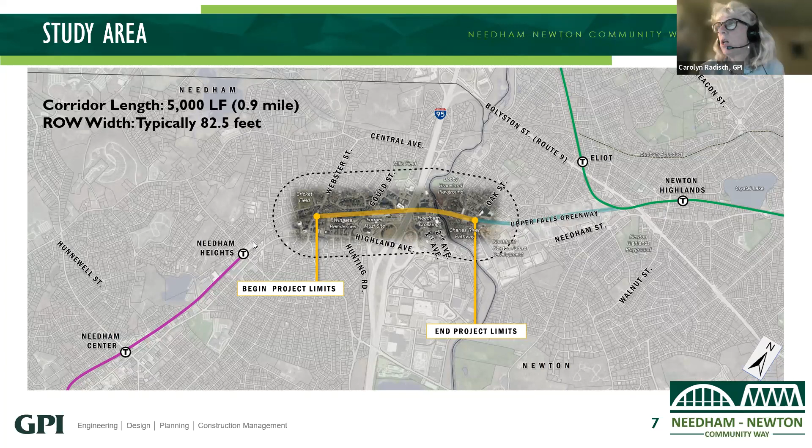The scope of the study was defined in the federal grant that funded the feasibility study, and that is to provide a community way between Needham Heights and the Upper Falls Greenway in Newton, as I just mentioned, and how that has been refined through the study.

The study was to consider a shared use path, with two options specifically called out: a path that accommodates only bicycles and pedestrians, and an alternative that accommodates bicycles, pedestrians, and electric shuttle buses. The recommendations for design and construction are based on standards and the feasibility of the different elements of the project, the bridges, the corridor.

Further planning and selection of a preferred alternative will be undertaken by the communities of Needham and Newton.

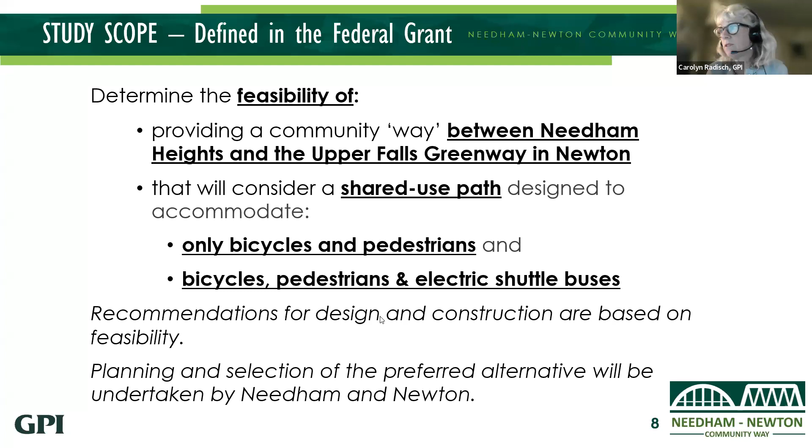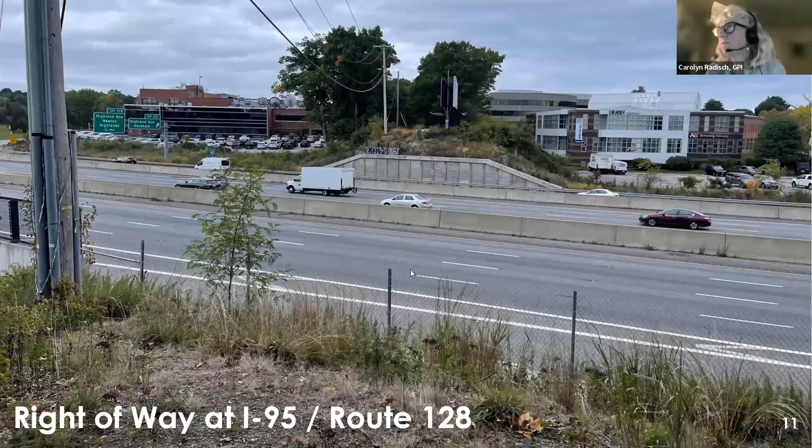This is the right-of-way at Route 128, I-95. As probably most people know, there was a rail bridge here until 8 years ago, and it was removed to add additional lanes to Route 128 for MassDOT's Add a Lane project.

So now we have basically 3 lanes in either direction on Route 128, I-95, as well as 2 exit lanes and 2 on-ramp lanes at this location. Altogether, that's 6 plus 4, 10 lanes, and it's about 225 feet to span this distance across I-95.

There's still an earthen fill area, which follows the path of the tracks, as well as concrete retaining walls.

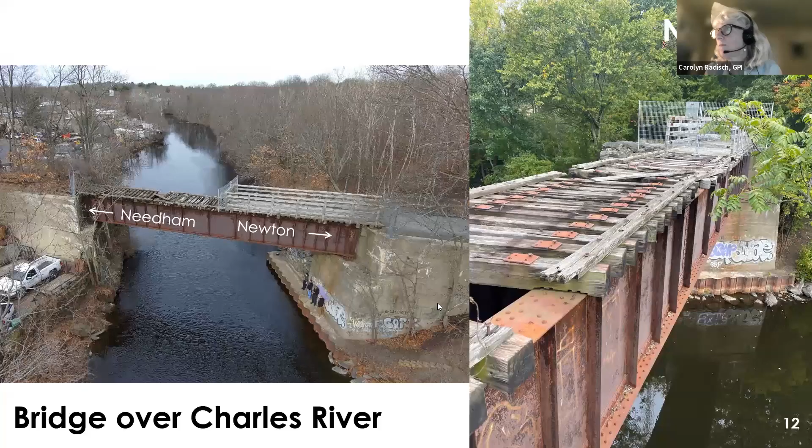This is the bridge over the Charles River, a steel beam structure on concrete and masonry abutments and wing walls. On the Newton side, a new deck was placed in, however it is currently fenced off to pedestrian use. On the Needham side, it has not been improved, and you can see there are still ties from the railroad in place on the bridge.

The final segment, between the Charles River and Oak Street, is the Upper Falls Greenway in Newton. This has been improved as a stone dust surface bike ped path. So that is an overview of the project area.

I'm just going to go over the main takeaways of what we heard through the April 2023 online community survey and through the questions we got from the public.

445 people responded to the online survey, so there's high interest in this project. About half were Needham residents, about half were Newton residents, about half were residents that reside near the Community Way or the Upper Falls Greenway. Most respondents did not attend the public informational meeting; only about 14% of the people that responded to the survey went to the public presentation.

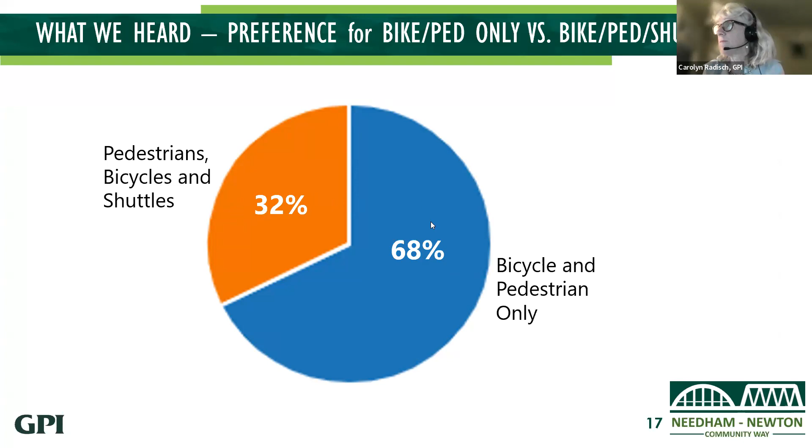With that background, we developed two alternatives and did very high level engineering and calculations to determine how feasible the two options would be, as well as what they would cost.

The two broad alternatives we've touched on are the bicycle and pedestrian shared use path. This is 18 feet overall, a 12-foot path with 3-foot shoulders. It's a paved path, and these are the design standards that would be applied in developing the shared use path in this location.

We assumed public funding would be used for this project to improve the corridor as well as the bridges, through FHWA, MassDOT, federal and state sources. That means we need to meet design criteria established by both state and federal agencies that oversee these projects, which is driving a lot of the design decisions in this feasibility study.

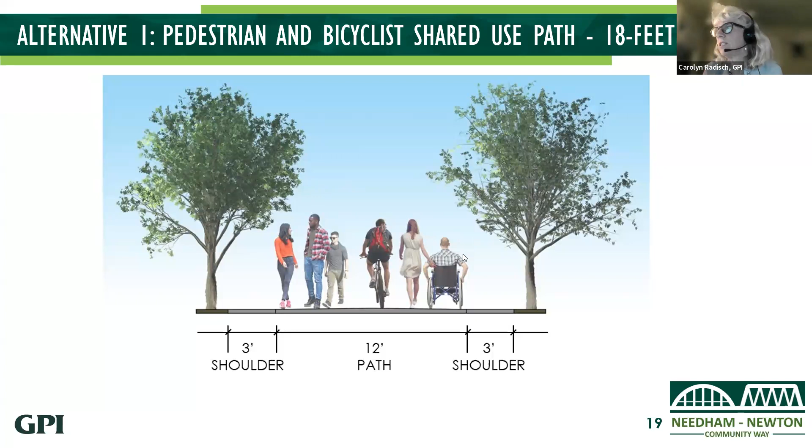The shuttle inclusive path would be 34 feet in width. That would include the 18-foot bicycle and pedestrian component, the 12-foot path with 3-foot shoulders, and then a separate shuttle path, which is basically an 11-foot lane with 2-foot shoulders, all separated by a fence, for a total width of 34 feet.

So that is what we assumed the shuttle inclusive path would be, used for looking at alternatives for improvements to the right-of-way corridor and the bridge over Route 128/I-95, which is currently a blank slate. However, the Charles River Bridge has structural elements already in place, so to fit the limitations and opportunities with those structural elements, there were three variations on alternative 2 to cross at the Charles River Bridge, which we'll discuss in a few minutes.

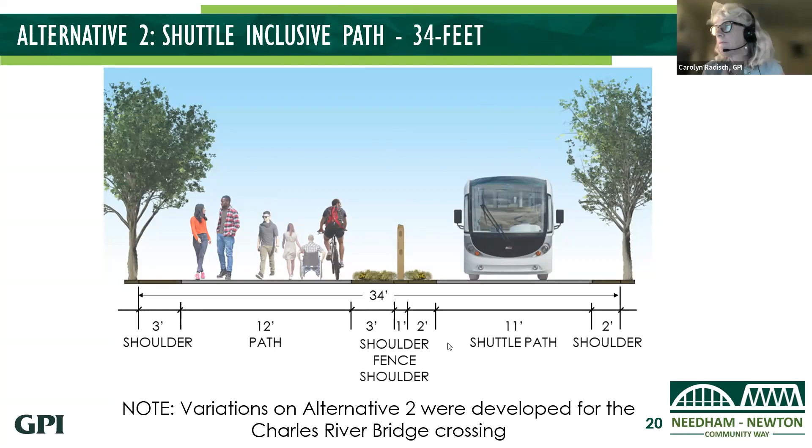Everything about this bridge would require MassDOT and FHWA approval in order to be built in this location.

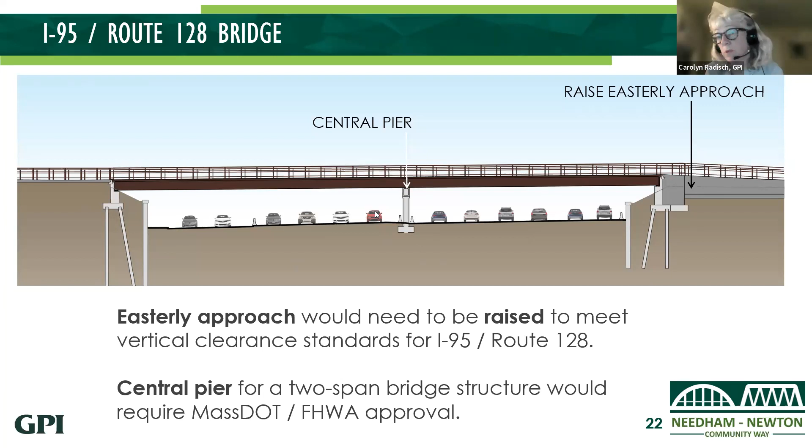The Charles River Bridge, as mentioned before, includes some existing abutments and a steel beam crossing this rail bridge, which has some limitations in terms of what we can use it for.

The existing structure is in satisfactory condition. The beams and abutments would need some repairs to the masonry and concrete to correct spalling and some missing mortar in the masonry wall, and to fix bolts on the beam itself, but basically the structures are in satisfactory condition.

The existing structures can accommodate a bike-ped path, the 18-foot bike-ped path, with no problem. The existing deck would need to be replaced, and it would be concrete for a shared use path.

However, for the wider alternative 2, that cannot be accommodated on the existing beam and the wing walls on the abutment. Because of that, we had to come up with some alternatives for how we might widen and add structural abutments in order to accommodate the wider path.

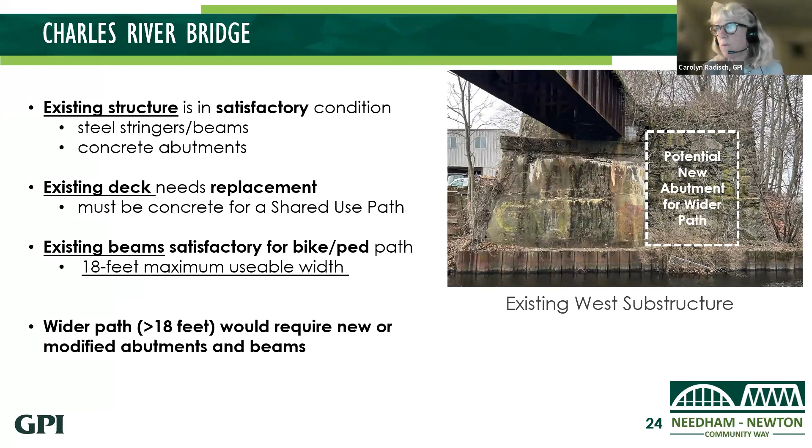The first alternative was to have a narrower path, 26 feet, which is the maximum we could have using this beam and a new abutment on the existing masonry wall. We cannot have anything wider than 26 feet there, which means the bridge crossing would be narrower than the 34-foot path that runs elsewhere along the corridor.

That would require a design exception from MassDOT to have a narrower bridge than the path. And to accommodate this whole alternative to the shuttle, the bikes, and the pedestrians, we would have a narrower overall section: a 9-foot shared use path for the bicycles and pedestrians, 2-foot shoulders instead of 3-foot shoulders, 9 feet instead of 12 feet.

So that's then a constrained width. And on the shuttle side, we would narrow the travel lane from 11 feet to 10 feet, and have 1-foot shoulders instead of 2-foot shoulders, and then 1 foot for the fencing. So that is how we would narrow down the bike-ped-shuttle option to 26 feet in one of the bridge crossing alternatives. We would need exceptions, as I mentioned, for a narrow bridge as well as for a narrower shared use path and shoulders.

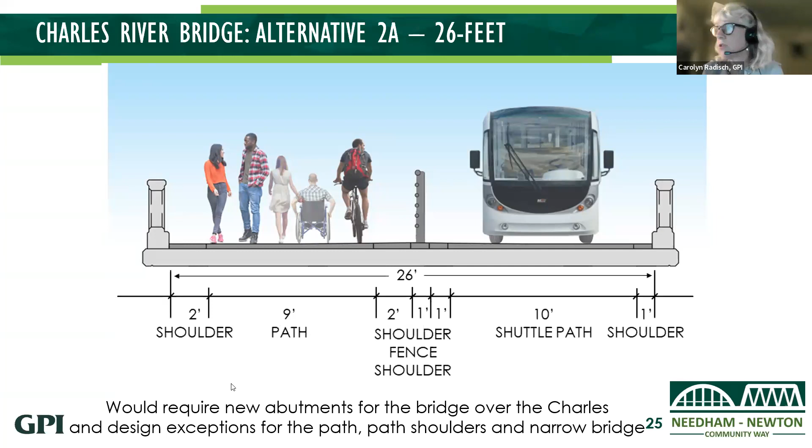The second alternative is to do a full width, 34 feet across the Charles River, matching the connecting parts of the corridor itself. This would require new abutments for the bridge over the Charles River. This is showing simply what is wider: the shoulders are both 1 foot wider than alternative 2A, the path is 3 feet wider than alternative 2A, and the travel lane for the shuttle is another foot wider with wider shoulders. So that's the difference between the 26-foot and the 34-foot options.

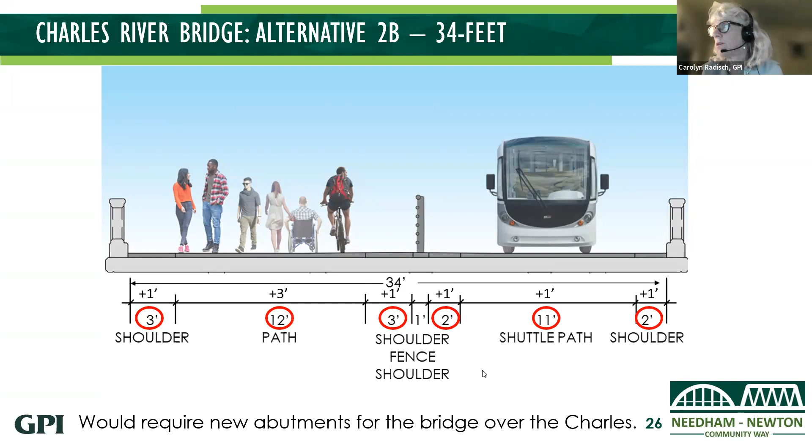What you don't see at the section level is that the substructure is much greater in terms of accommodating the wider bridge. The final option that we looked at for crossing the Charles River is to accommodate 2 bridges.

So we would use the existing beam and abutment wing walls for a bicycle pedestrian bridge, like alternative 1, and then have a separate shuttle bridge that would require new abutments in order to accommodate this second bridge. So going across the bridge, it would be completely separate bridge structures.

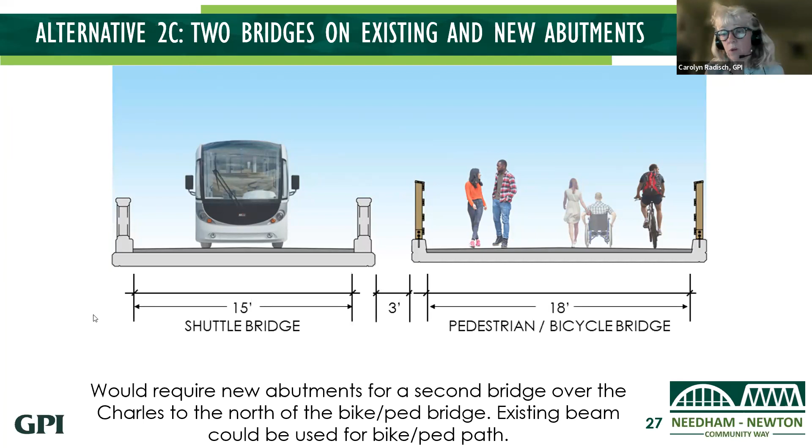Because of the way that the existing beams are accommodated within the 82-foot right-of-way, the second bridge would have to be on the north side of the right-of-way for the shuttle. So the shuttle would go along the north side of the right-of-way if this alternative were used for crossing the Charles River.

There were also questions at the meeting we had in April, the public meetings, about how you widen the path along the corridor. How you widen the path determines how much retaining wall you have, how much earthwork you have, which in turn affects the cost.

So these are a couple of graphics we did for illustrative purposes. This is not an actual section, but it shows typically the situation we have along the corridor, where we have this sort of trapezoidal fill section that is in place. And so, to get that section wider from its current 15 feet to accommodate the 18-foot path with 12-foot path and 3-foot shoulders, we can grade it down.

This is showing where the existing grade is. You shave it down a little bit and then you're further down the trapezoid, so you're in a wider part of the path. That's one way to do it. Other areas we would need to have retaining walls. We did calculate that as part of our feasibility study and cost analysis. For alternative 1, we're looking at about 2,000 linear feet of retaining walls along the corridor.

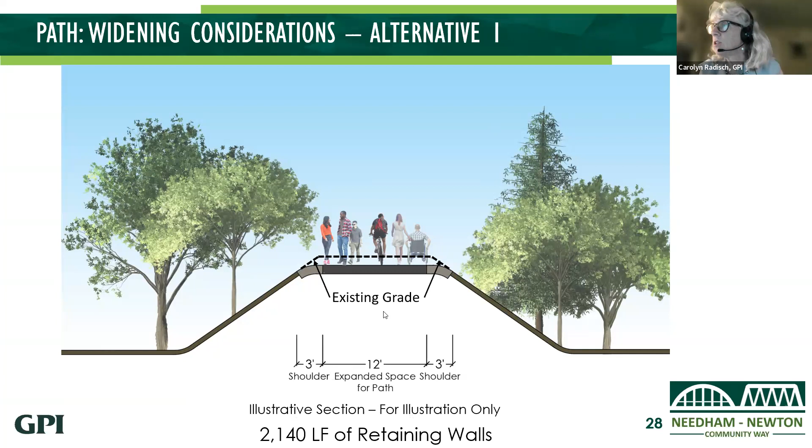And then to look at how you get the wider path in here, we're going from an 18-foot path now to a 34-foot path, again accommodating that within the existing grade. A couple things that are done: grading it down, as well as putting in retaining walls on either side with fill that helps to have the larger flat area.

So when you do that, this is the 34-foot shuttle inclusive alternative. Where there are steep drop-offs like this, like the retaining walls, we have to have railings on the pedestrian side, and we need a guardrail crash barrier for the vehicle side. For the vehicles, we need a 4-foot offset between the guardrail and the retaining wall. On the pedestrian side, we need 1 foot between the pedestrian railing and the retaining wall.

So you can see how when we're looking at a section like this, where we're elevated, to get the 34-foot wider path, it involves more grading as well as potentially retaining walls. And the retaining walls themselves have to be out further in order to accommodate a crash barrier for the vehicle side and railings for the pedestrian side.

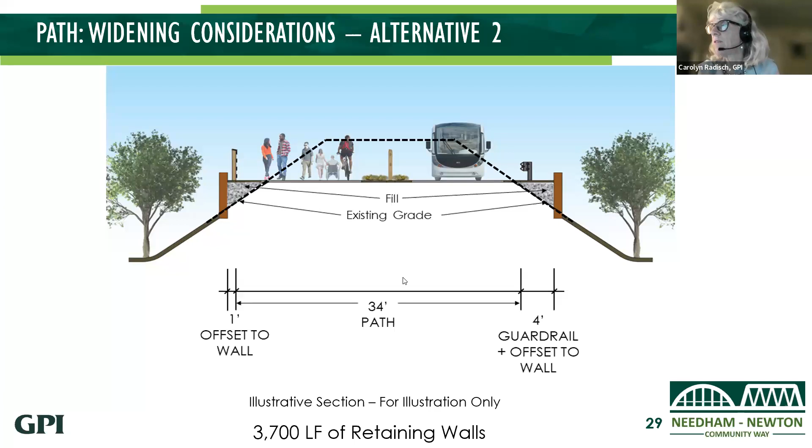We also looked into right-of-way licenses and encroachments along the path. Over time, it's not unusual on abandoned railroad corridors that aren't fenced for adjoining properties to not quite know exactly where their property line is, and to use some of the area along the right of way.

The MBTA also issues licenses for citizens, municipalities, or companies that wish to use the right of way, and these would need to be accommodated in the design. Within the project area, the licensees the MBTA has for the corridor are primarily utility companies, which again is not unusual, as well as WCVB on TV Place in Needham, which has a license I believe for parking. So we'd need to work within those licensed users.

Utility companies need to have access to their utilities. Generally that can be worked out with a shared use path.

In looking at the aerial mapping just collected for the corridor, there are some additional encroachments we observed that would need to be followed up on in project design: material and equipment storage from businesses that abut the corridor at Arbor Road and Fremont Street, and landscaping from the Wingate residences at Gould Street that goes pretty far into the corridor. None of these seem to be anything that would make this project infeasible, though the corridor would likely conflict with the landscaping at the Wingate residences.

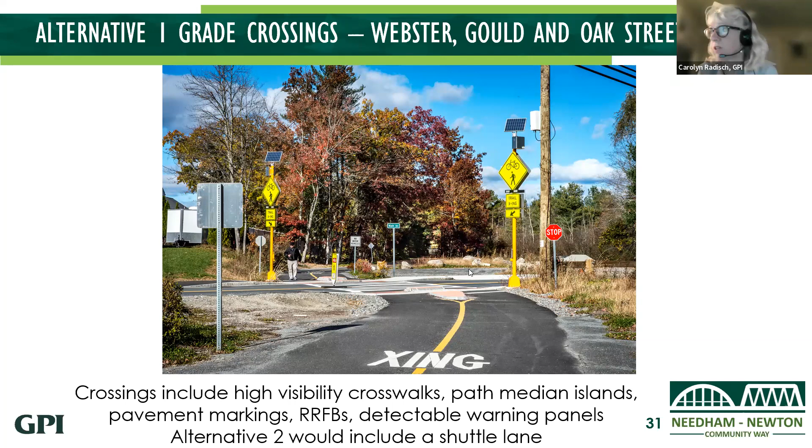There were several questions about vegetation removal. There would be vegetation removed as part of the project.

With alternative 2, a 34-foot way within the 82-foot right-of-way, there's still 48.5 feet that would remain as open space. Sometimes that's in slope banks, but it is vegetated, so again roughly 24 feet on either side of the path is typical.

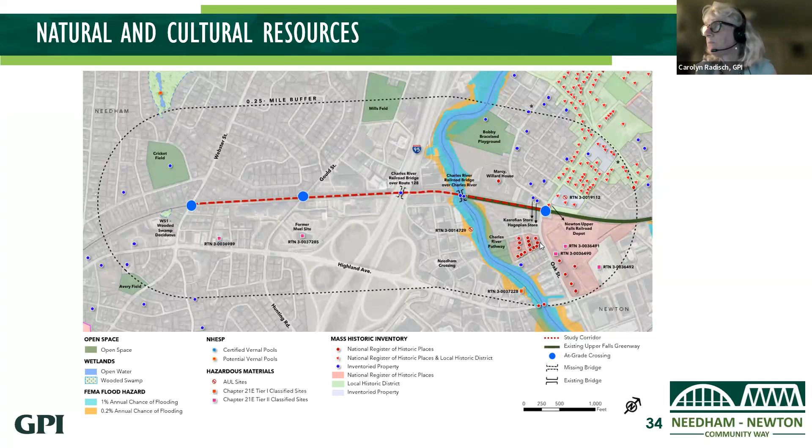This is just a quick environmental permitting survey summary, not to get into it in too much detail - it is in detail in the feasibility study. But basically for alternative 2, there's some more permitting that would be involved because of the work within the Charles River corridor to have to expand the abutments. So there'd be a local notice of intent to the Needham and Newton ConsCom, and some MEPA filing.

Alternative 1, again, is more straightforward. It could even possibly be seen as maintenance of that existing bridge, but alternative 2 has more steps to go through in terms of permitting at the state and even federal level.

So in terms of costs, we ran costs for all of the alternatives and the variations for crossing the Charles River. And the costs include construction costs, based on MassDOT's costs that are available, as well as our project experience for bridge and rail trail development. And we came up with construction costs.

And all of these costs include contingencies for the estimate. So 25% of the construction cost is an estimate contingency, which reflects how early we are in the design process. It's very high level - we're working off of aerial photos and a LiDAR survey. We don't have detailed survey information.

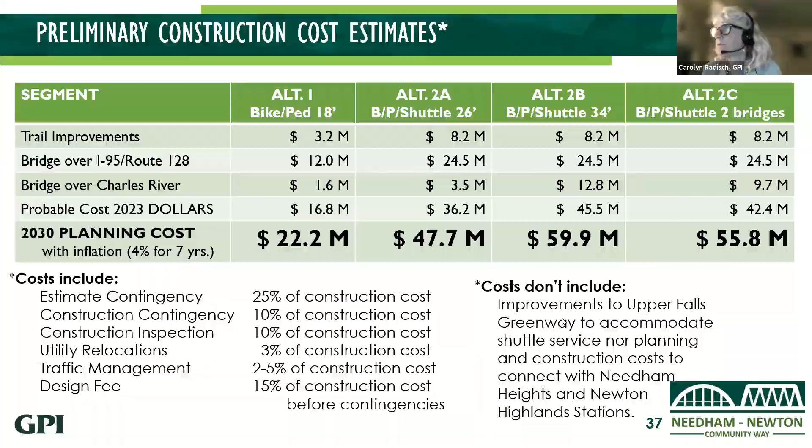The bridge over Route 128, I-95, is the same in all of the alternative 2 options. It's about twice as much for the 34-foot bridge as for the 18-foot bridge in alternative 1. You can see the range here in terms of the cost for the Charles River Bridge.

So in terms of the conclusion, both projects appear to be feasible from an engineering point of view and from a permitting point of view. There are some design considerations, as I touched on as we went through the project area. Alternative 2 generally requires more earthwork, retaining walls, and vegetation removal due to the wider 34-foot path.

Both alternatives appear to maybe conflict with the encroaching landscaping at the Wingate residences. For the Route 128 bridge, you need to raise the grade on the easterly side, and there would need to be a center pier in the highway median for a 2-span bridge, which would require review and approval for the bridge and the center pier by MassDOT and FHWA.

For the Charles River Bridge, the existing beam and abutments limit the width to an 18-foot bike ped path. The shuttle path will require additional supporting structural work, and the permitting impacts would involve more steps with alternative 2 than alternative 1 because of the additional work in the river corridor with the structural abutments.

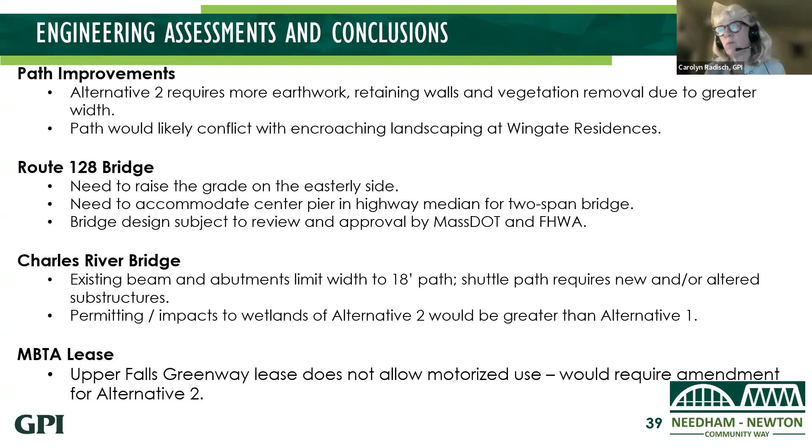Also, with respect to the MBTA lease that already exists for the Upper Falls Greenway, it currently does not allow motorized use, so that would require an amendment to accommodate alternative 2.

So moving on to next steps. With this information, the communities, Needham and Newton, should move together to develop a process to jointly determine a preferred alternative. The options are either alternative 1 as being preferred, a shared use path for pedestrians and bicycles only, or alternative 2.

For alternative 2, more needs to be understood about the shuttle service—what the operation is, what the routing is, what the ridership would be, and who the transit service provider would be. All of those questions are unknown at this time and would need to be understood and worked out before moving ahead with that option.

Another option is to not do any development at this time in the corridor. So, a couple of thoughts about a process for implementing the two alternatives.

For alternative 1, which is the bicycle and pedestrian path, Needham would primarily need to negotiate a lease agreement with the MBTA to use the corridor for bicycles and pedestrians between the Needham limits at the Charles River to Webster Street.

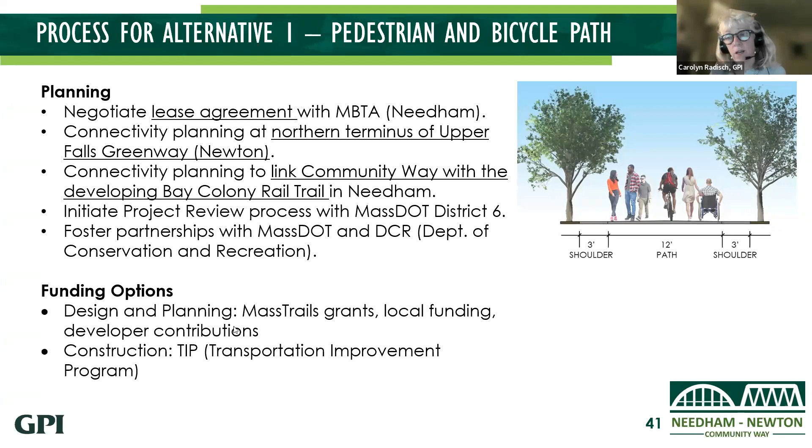For alternative 2, if it is the preferred alternative, there is quite a bit of transit planning that needs to be done in advance of applying for funding for the project.

The towns would need to work with the MBTA, the Boston MPO, and stakeholders in both communities to understand the transit demand and potential solutions along the Community Way and also the Needham Street and Highland Avenue corridor.

One of the things we struggled with in doing this feasibility study was that the transit alternative is not very well defined. There was a study done by the MAPC some time ago, maybe 10 years ago, that looked at ridership by basically using a modification of the Needham shuttle run by the Route 128 Council, which picks up reverse commuters at the Newton Highlands Green Line station and distributes them primarily to Needham Crossing. That study is now almost 10 years old.

So we need better ridership estimates. We need to understand if there are other routing options, and what the difference is between using the Community Way versus using Needham Street and Highland Avenue, perhaps enabled with transit signal priority to help expedite transit service. Cost estimates would need to be updated, including understanding the cost to improve the Upper Falls Greenway for the shuttle-inclusive option, if that is part of the transit route.

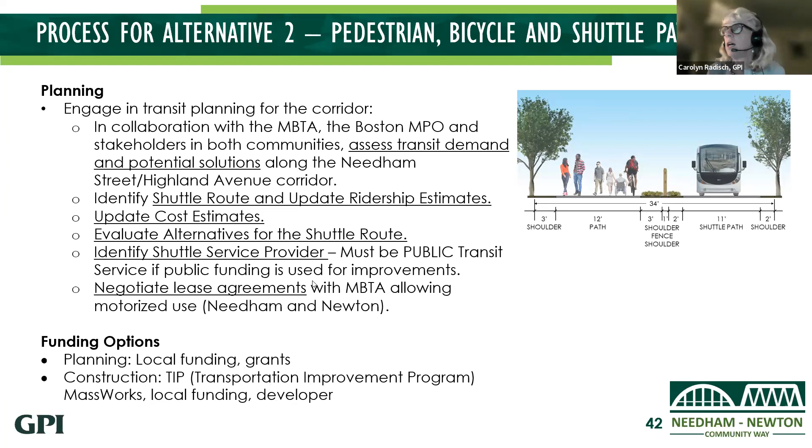So that concludes our presentation on the Community Way Feasibility Study. Again, the full study will be available on September 22nd. It'll be posted to the websites that both Needham and Newton have for the Community Way.